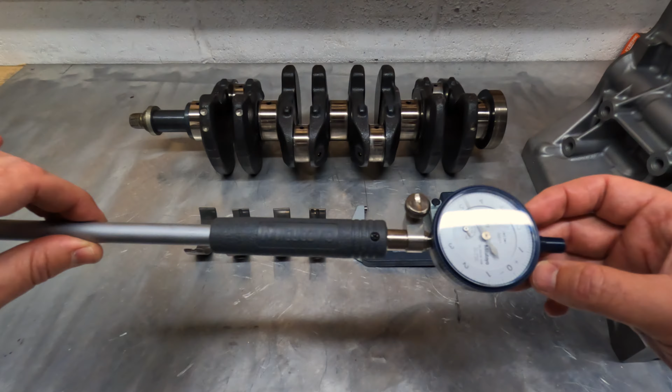So what do we need for this job? Tools wise, we want a bore gauge - this is a Mitutoyo one, and it's imperial, so it's measuring in thousandths of an inch. I've also got a digital micrometer because I'm lazy. I do know how to use a normal micrometer, but I'm just going to use that one for now.

Obviously you need your crank - that's been polished, ready. It looks a bit weird at the moment because it's a bit condensated from being cold in the garage. And then you need a new set of bearings. So that's what you need, and obviously you need your block. Hopefully you can see that.

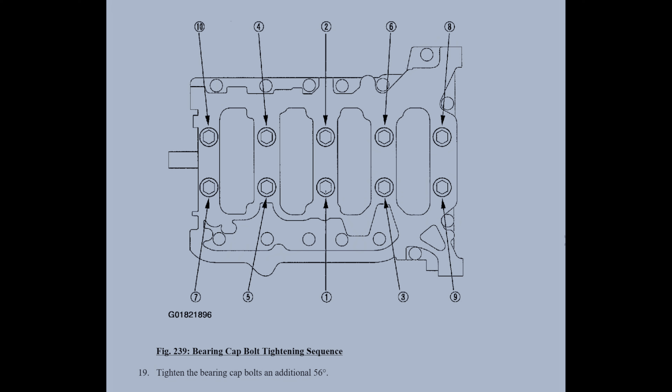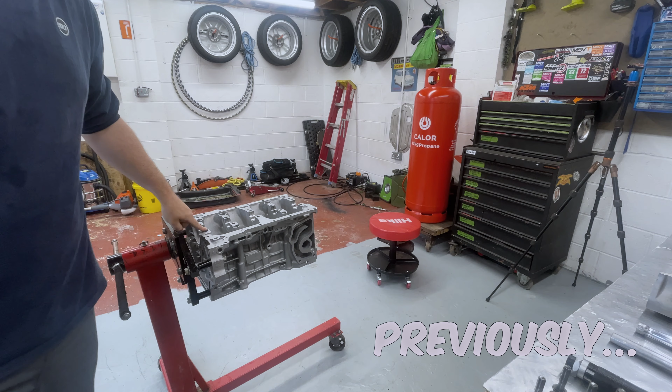Okay, as I was saying before I got rudely interrupted, just swapped out this yellow bearing for a green one. I'm going to pop the girdle back on, tighten everything up in sequence. Got the safety sliders on, obviously.

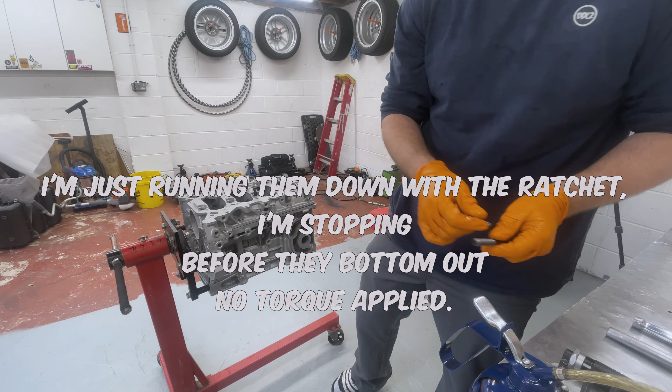Oh, damn it. 29 Newton meters.

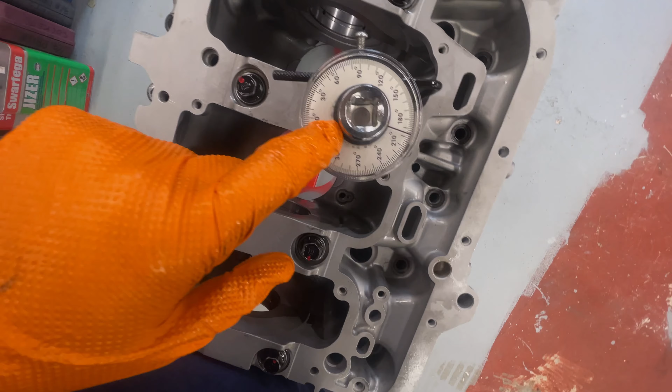Second half involves your angle gauge. So what we're attempting to do here is put 56 degrees of torque on after the 29 Newton meters. You use the bracing bar against the inside here and basically wind this to 0. It'll look off because of the camera angle, but it's bang on. And then we put 56 degrees of torque on it, or 56 degrees of turn.

Try to do one smooth motion as the engine stand moves - annoying. Okay, there's one done.

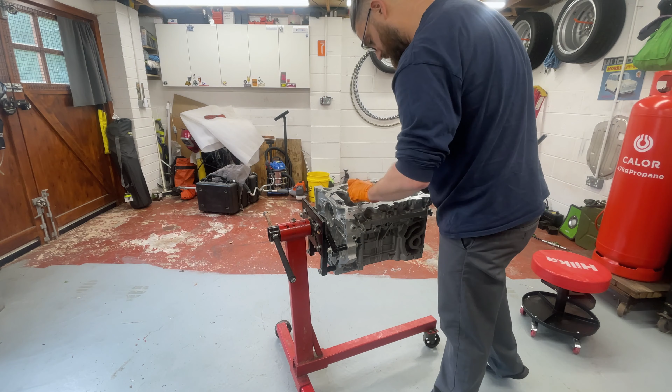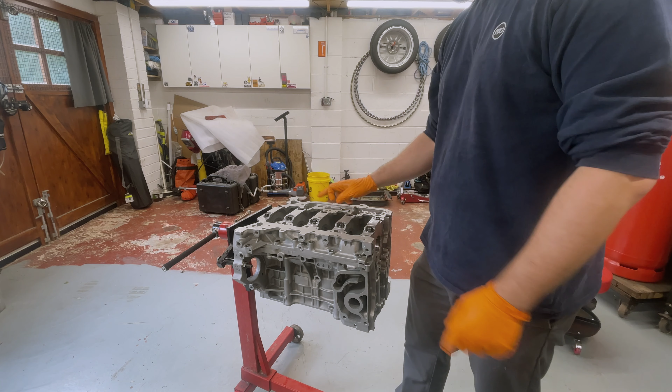Good one. Right, that's the main girdle bolts in - 29 Newton meters, and then 56 degrees, in the sequence 1, 2, 3, 4, 5, 6, 7, 8, 9, 10. Keeping up? Good, I've done this about 1,000 times now.

Right, okay, so then you drop in the outer girdle bolts. You've got 4 long ones that go opposite number 3 main, and another 10 that go around the outside. These are done at 22 Newton meters - there's no angle required, just 22 Newton meters straight on. There is a sequence, similar to the other one, like a crisscross pattern from the middle. It's in the manual, if you download one.

And number 14. That's one. Cool.

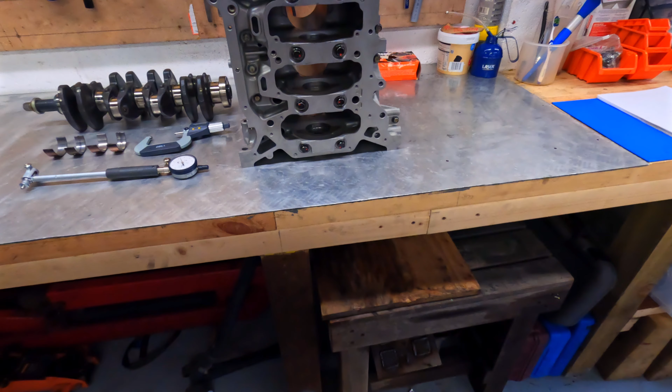See that on nipple cam. I've already got new bearings in there, which I've been checking the sizes using these two tools here. I'm not going to go in depth into how to use these tools - I'm not an expert on it myself. You've tuned in to basically someone that has no idea what they're doing, as you probably already realised. So what are we doing? We're measuring main bearings to work out what bearing shells we need.

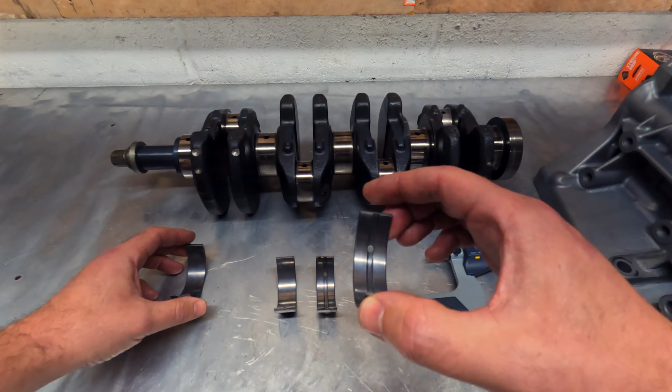So very quickly, the main bearings are here - 1, 2, 3, 4, 5, and the other ones are rod bearings. That's your rear main seal end, and that's your timing end, counted 1 to 5. The bearings come in 2 halves - one has a groove in the middle, an oil galley, and a tang on one side, and these fit into the block, or the top half of the engine. Then you've got these smoother ones, which go into the girdle. The tang on these is in the middle, so you can't mix them up.

Pretty straightforward. These ones on the bench here are newish ones I've been using to measure. You can probably make out the score marks from the gauge - you can't really feel them, but because I'm particularly anal about these sort of things, once I know what colours I want, and I'll talk about the colours in a minute, I'll just put new ones into the engine block. But for now, I just wanted to show you how I've been measuring these.

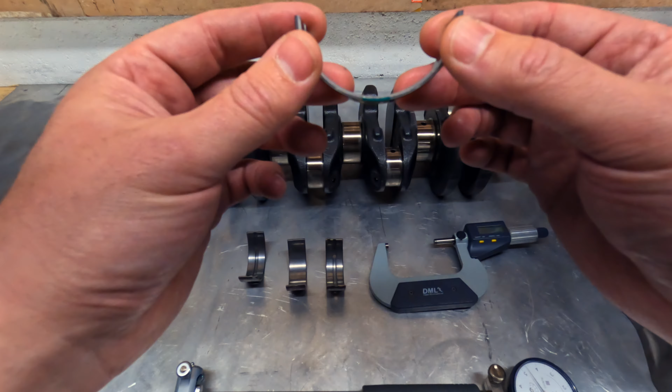Another note on the bearings: all of the Honda OEM bearings are color coded. Hopefully you guys will be able to see this, but there's a bit of green paint on the edge of this bearing, so that's a green bearing. So what, you might ask?

Well, the other part of the puzzle is you need to know what size bearings to start with. You need a rough idea what size bearings you're dealing with. If you haven't had your crank polished and it's your original engine that the crank came out of, you can probably use the same colours again, as long as there's not too much wear on the crank. But because this block is not the original block that crank came out of, we need to measure and check some details.

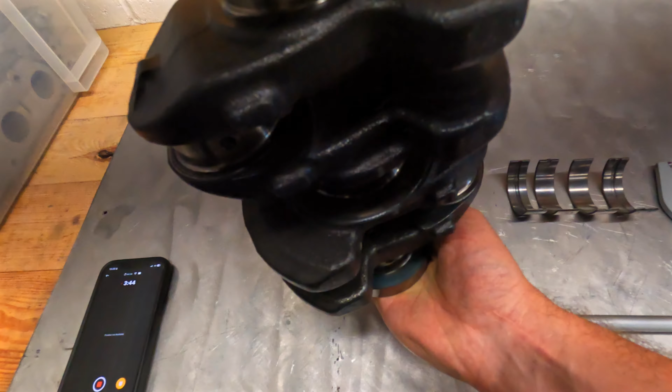On the end of the crank, come on, titty cam, you'll see some numbers here, 34343, and that code relates to what bearings we need. But we need another set of codes which are on the girdle, and you'll find them here, and that one says 34434.

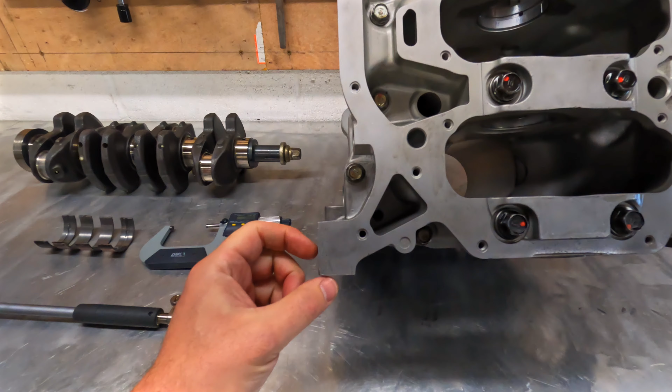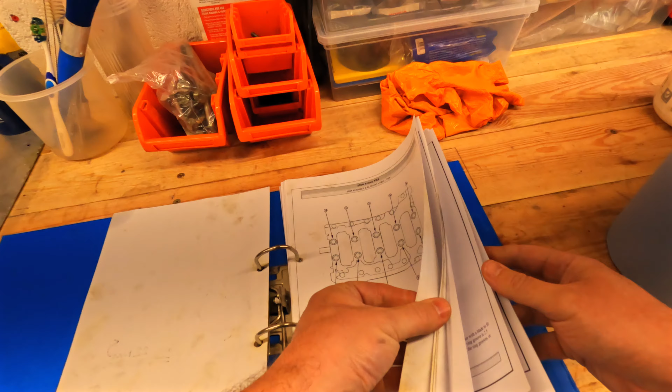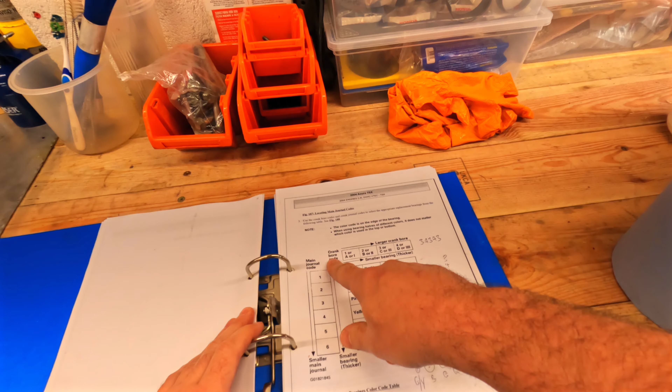So we then go to our manual. It's all in one table, and you can see we've got the numbers here. So the first bearing would be 3.3, so we go along here, crank is 3, main journal is 3. That bearing needs to be yellow and green. Okay, cool. So that's how I've been working out what bearing colours I need.

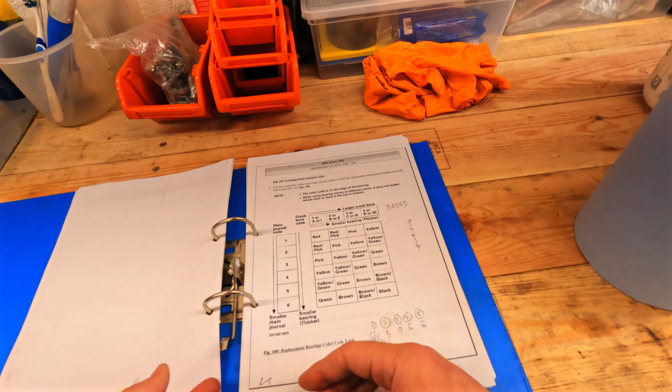Okay, we can use that for a start to get us in the ballpark, but of course, because this is a different block and this crank has been polished, there's no guarantee that those colour combinations are going to be correct. And of course, depending on the type of engine you're building will depend on what oil clearance or bearing clearance you'll want to achieve in your motor. So if you're running a turbo motor, you're probably going to want a bigger clearance because of the heat. If you're running an NA motor, you can have a slightly tighter one.

The manual gives us some guidance on what clearance to use, and I'll show you that now. You would have heard the guidance that for every inch of journal diameter, you use a thou of clearance. So if it was 2 inches, you'd have a 2 thou clearance. Fair enough, but in the manual, the Honda tolerances are actually a fair bit tighter than that.

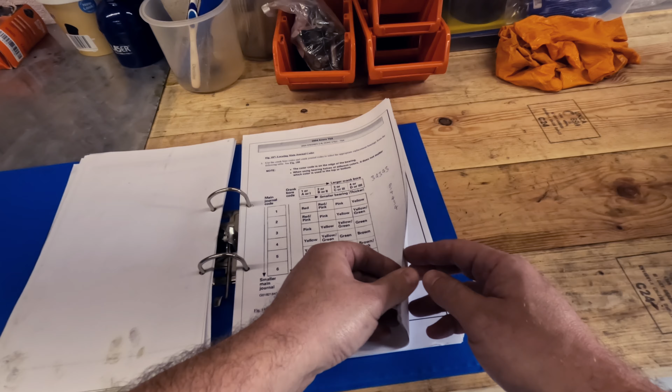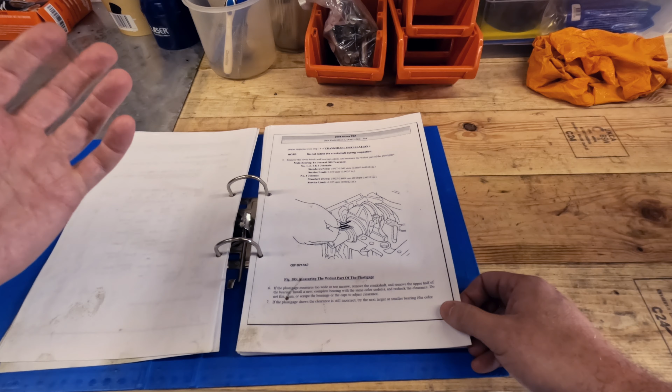I've been given some advice on what size clearances to use for my engine and its application. Obviously, if it's a road engine, you can run slightly tighter. If it's a race engine, you can run slightly wider. And then, of course, oil also comes into it - what oil are you going to run? Are you going to run a thin race oil, or a thicker road oil? So on and so forth.

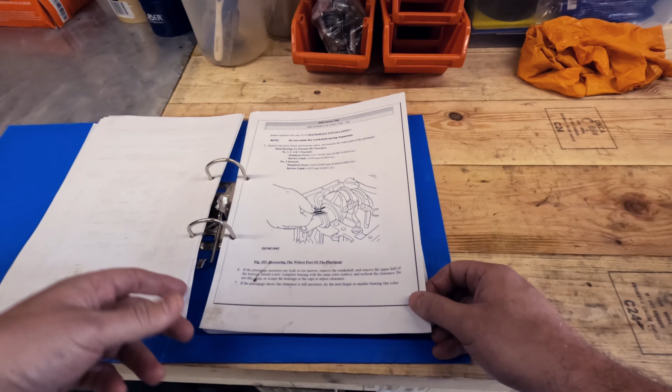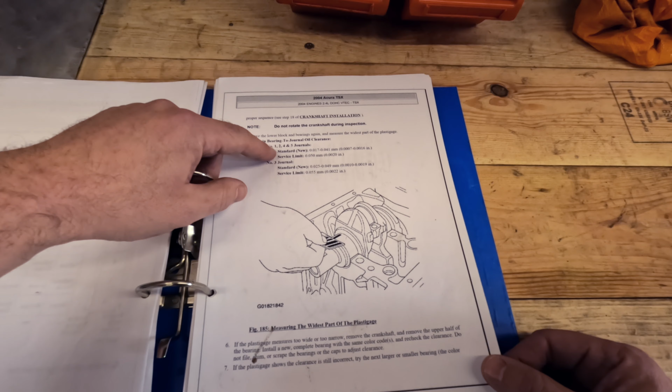Anyway, we can see here, we've got some guidance on main bearing to journal oil clearances. You'll see you've got 2 numbers. Journals 1, 2, 4, and 5 are different from journal 3. But the long and short of it is a new bearing in 1, 2, 4, and 5 needs to be between 0.7 and 1.6 thou. That's how you read that.

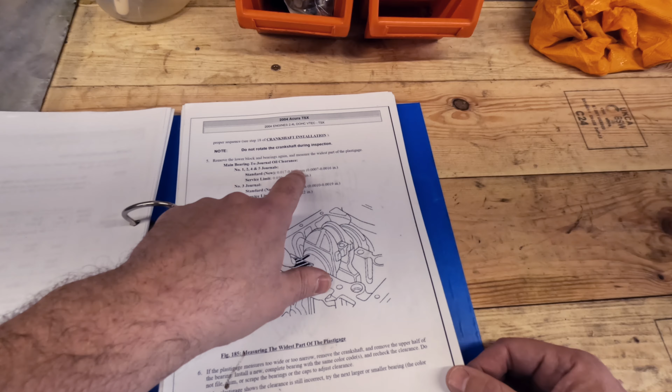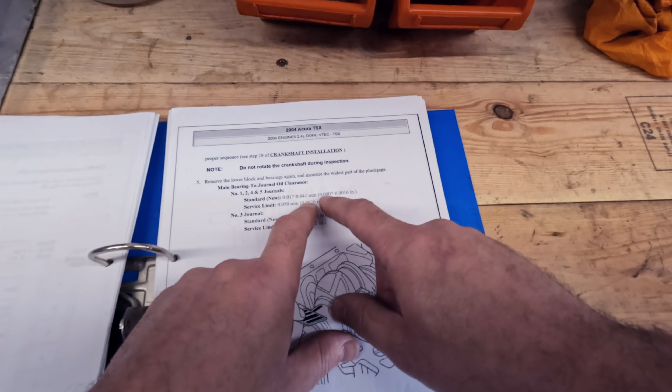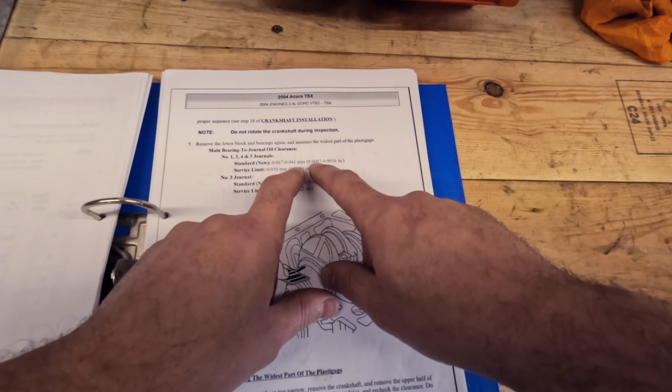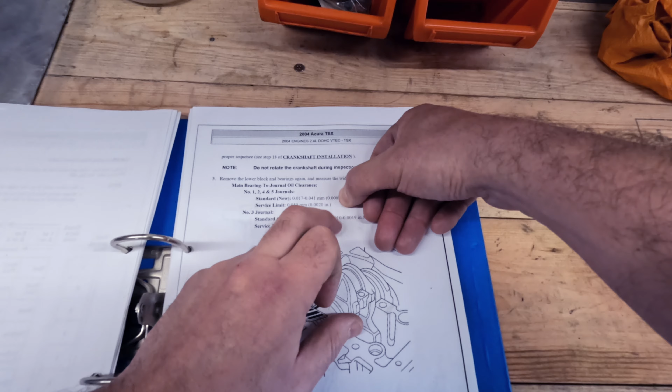In case you've never read in thou before, you can use millimeters if you want, if you're more comfortable with that. But obviously this is tens - how do I explain this - so that would be tens. I don't know the best way to explain this, but basically if this was 1,000, that'd be 1,0,0,0. And if you want to go into tenths, you've got another number on the end there. If you ignore that and just look at 0.000, that's reading down to 1,000ths of an inch, and that's down to 10,000ths of an inch. Going down to the 7 - so if we ignore that for now and just say 0.000, if the end 0 was a 1, that would be 1 thou.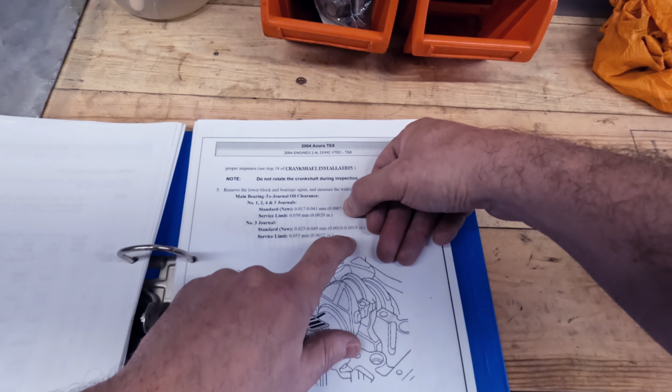Okay, makes sense. If the end was a 2, that's 2 thou, and so on. So when I refer to 0.7 of a thou, what I mean is it's 7/10ths of 1 thou.

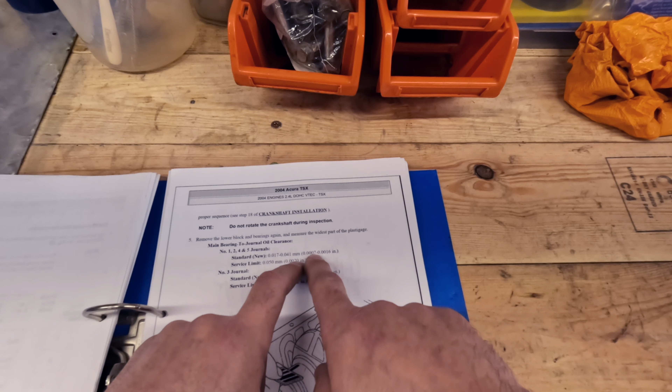Hopefully that makes sense. My engine builder, the guy I've been speaking to, has recommended I aim for about 1.5 thou, which would look like a 1 and a 5, which is closer to the largest size that the Honda manual is kind of recommending.

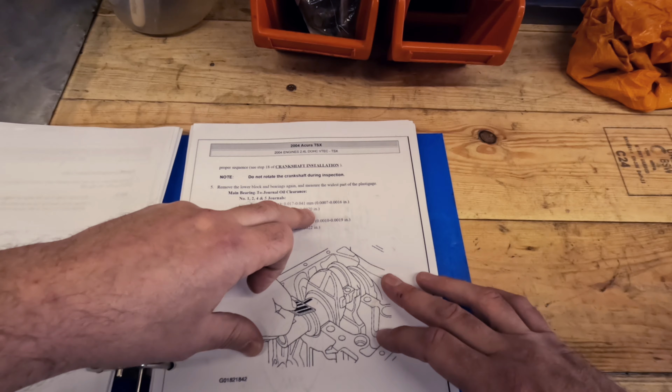Then you've got a service limit here. Obviously, once you get to 2 thou in the manual, it's saying that you should replace it or think about doing something with it.

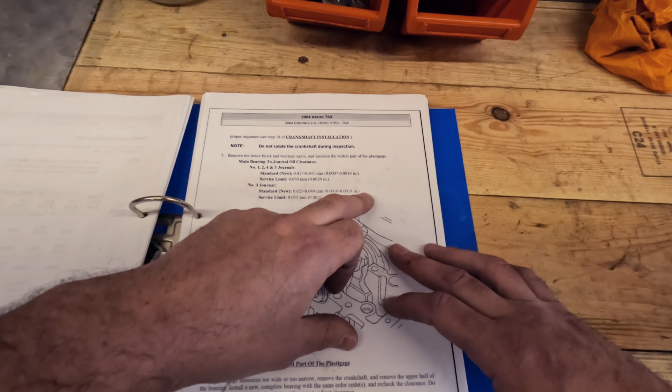And then you've got a bigger clearance on number 3, but again, I'm aiming for 1.5 thou, so that would be 15 at the end, if you know what I mean. Cool, hopefully that makes sense.

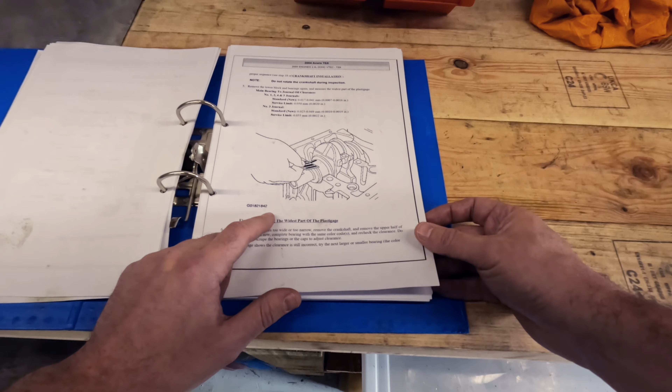They use Plastigage. I've struggled to use Plastigage - I've got inconsistent results with it. I'm going to use measuring tools instead.

So that's that. Cool, that is a hell of a lot of waffle. So let's actually do some measuring and I'll show you the process I've been following. If any engine builders or machinists out there are laughing now, stop - just stop. Please tell me how.

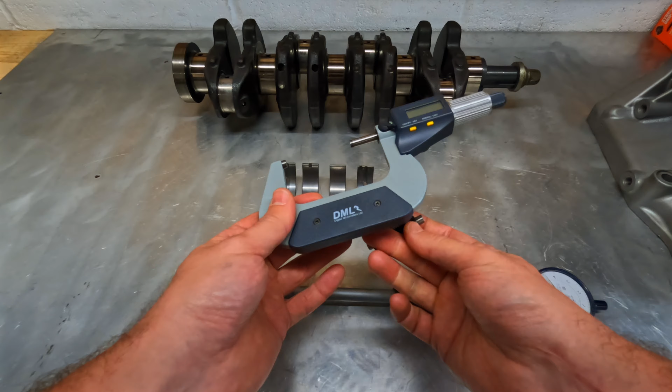Okay, so before we get started, we're going to zero our micrometer to make sure it's accurate. I know I said I wasn't going to go in depth on these, and I'm not, but yeah, I'm going to zero this.

So it's got a 50mm zero tool, or zero block, if you like. Try and do it so you can see it, hopefully.

I'll put this back in millimeters. So just for the sake of zeroing this, I will turn it to millimeters, but I'll switch it back to imperial, or as the Americans call it, standard. Because it is the standard, right?

So you make sure the anvils are pretty clean. Anvils are the ends of the tool - the measuring surfaces, if you like, the measuring faces.

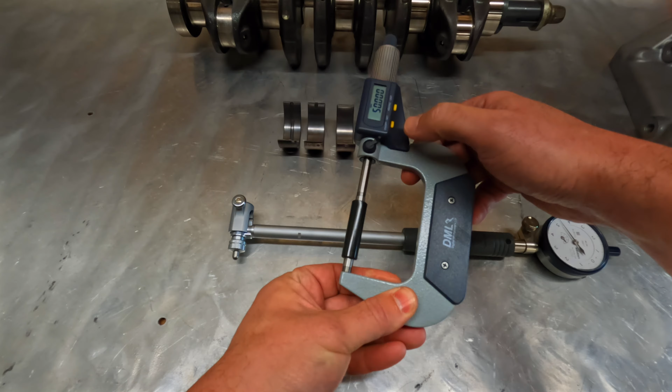So you can see that's 0 to 50mm, hopefully. Turn it back into inches.

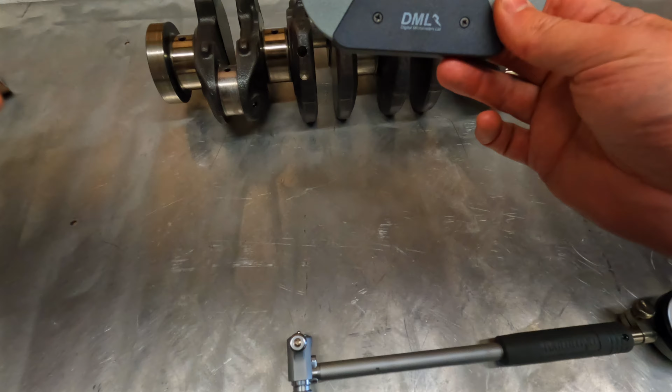Okay, so I'm not going to demonstrate absolutely every single bearing because that would just take me all day, and I've already done it. So for now I'm just going to go through the process of measuring one to show you what I've been doing. And if anyone wants to let me know if I've been doing it wrong, I'd appreciate it.

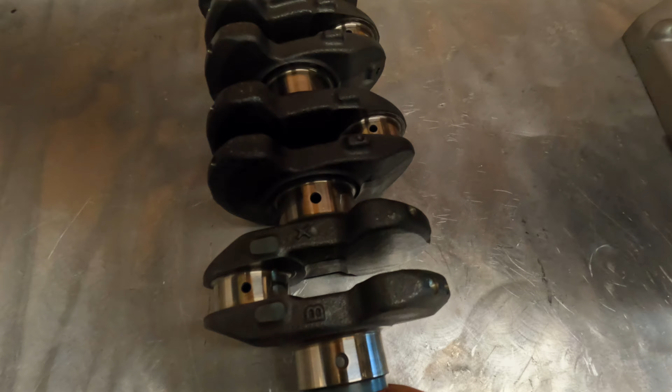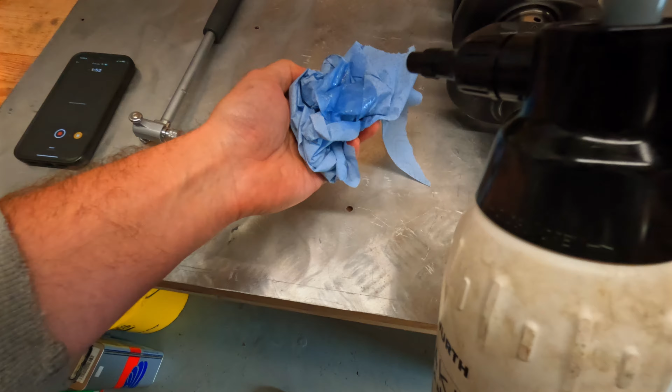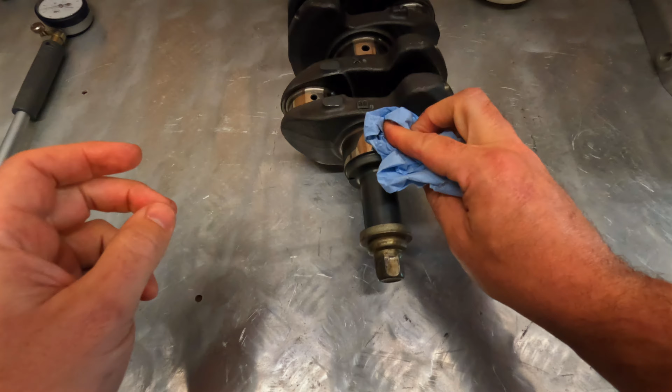So this is just a bit of brake clean, because of the condensation, and if you've got any contaminants on there which could affect your reading, give it a quick wipe with brake clean.

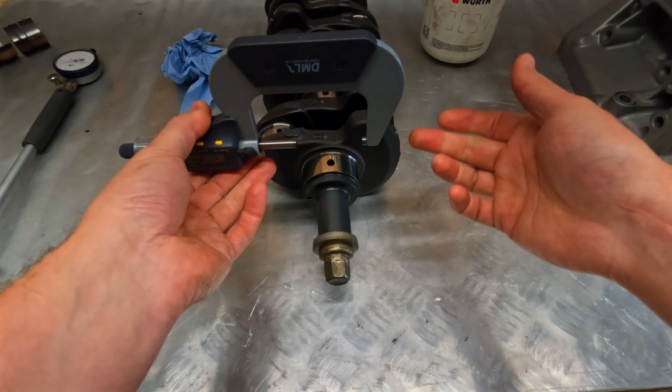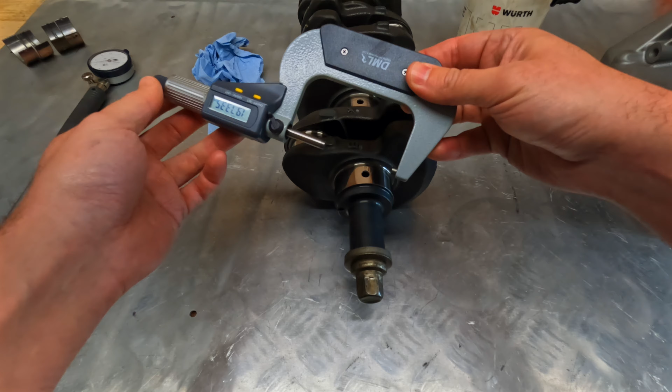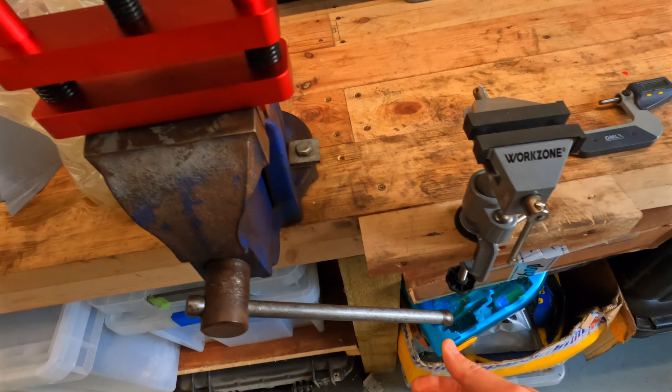So what we do is we take this out of here. That's for something else - I'll show you guys later what that is.

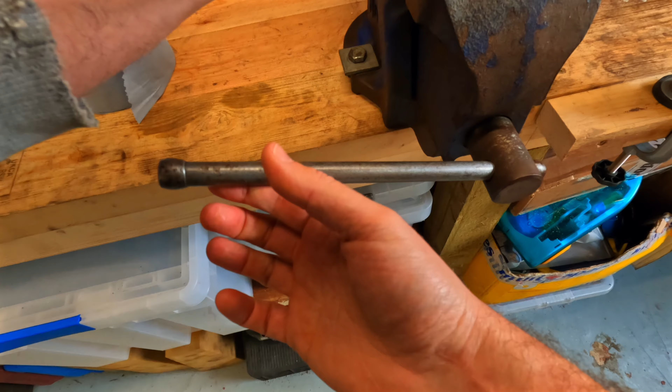So we put our micrometer in the vise. Don't absolutely crank it down, there's no need.

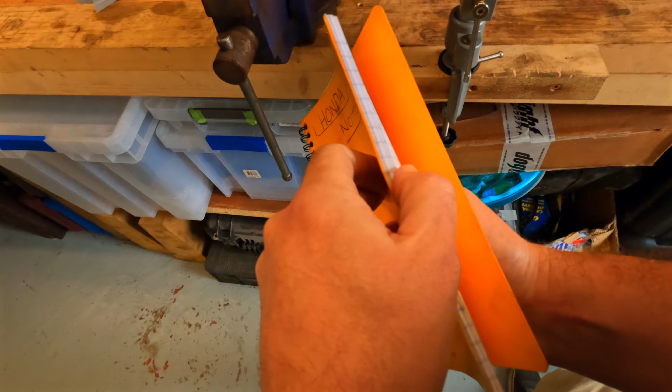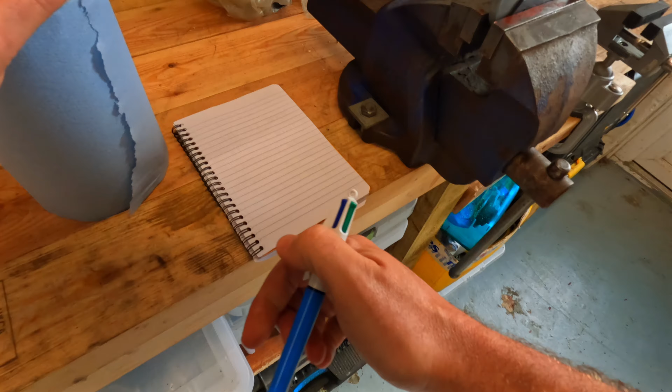For the sake of this, there's a lot of crap in here. For the sake of this demonstration, I should probably cut a lot of this out - I'll have people whinging at me that it's 15 minutes of video, it's too long, it's pain. Go watch TikTok then. Right, so what did I write?

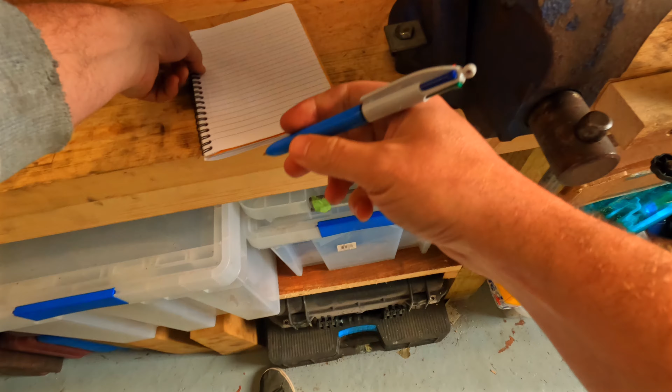2.16485, right, so we're saying that's bearing number 1. That's the journal size, right?

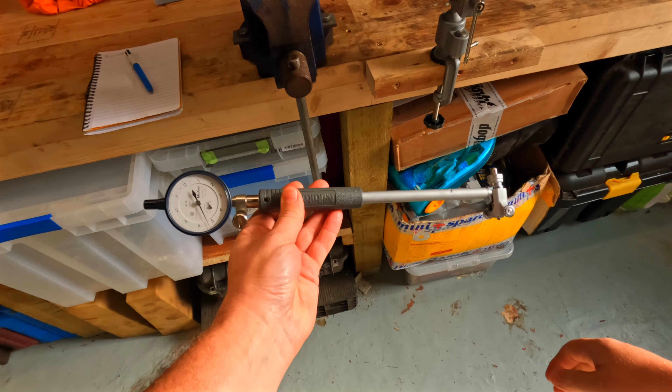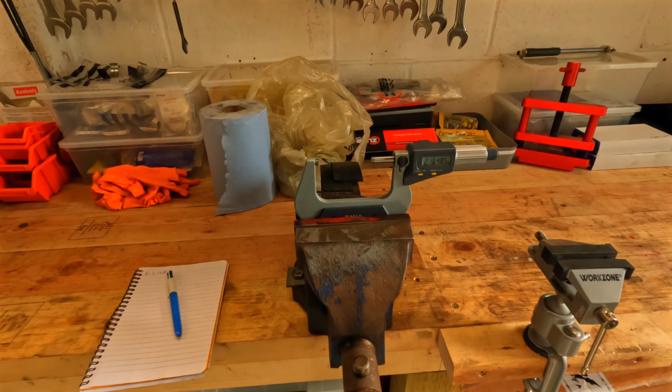Cool, the next bit, which is the other tricky bit, is we now need to zero our bore gauge. I don't know how well this is going to show, might have to tilt you up a bit. Oh, it's not really wide enough, is it? Bastidos.

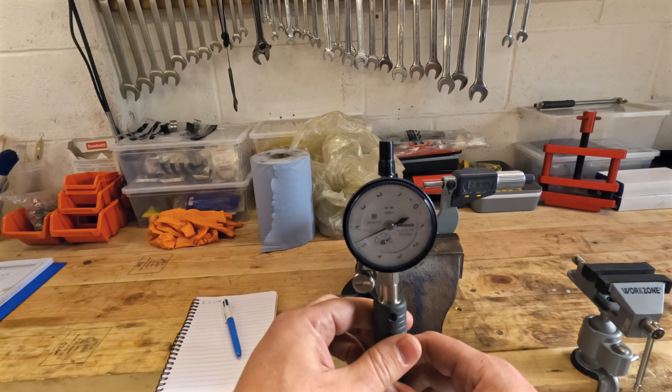Basically what we're going to do is put this anvil here in between the anvils of the micrometer, and what we're trying to achieve is to get this dial to read 0. Once we've got that, the technique for doing this, or so I've discovered... oh man, I really want to try and get this. How can I show you this? Bear with me, I hope you can see this, this is going to be tricky. So basically what we're trying to do is zero the gauge in here.

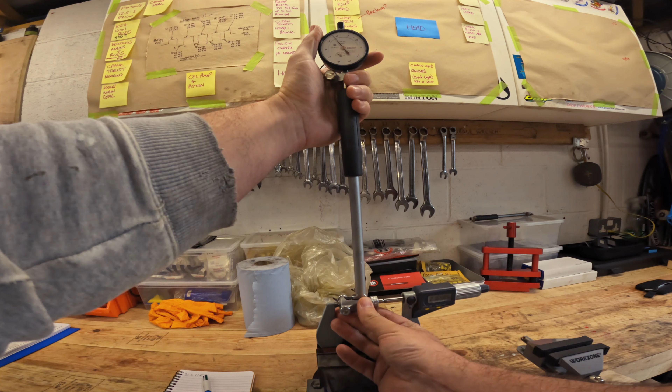You'll see as I sweep, as I move this in the anvils, the gauge is moving, and we're trying to find the 0 point. So we're trying to find the point where the needle won't go past 0 anymore. See, it's quite close there, hopefully. It's gone too far.

So once you do the up and down, which is kind of like this motion, I'm also slightly twisting it just to make sure I've not missed a low spot, or I'm just off slightly. So hopefully, I'm trying to lean back a bit so I can get this in shot. Well, hopefully you can see I'm a little bit off.

Right, so I'm pretty confident that you can see here, that's 0. Try and get it back to 0. There. Right, hopefully that makes sense.

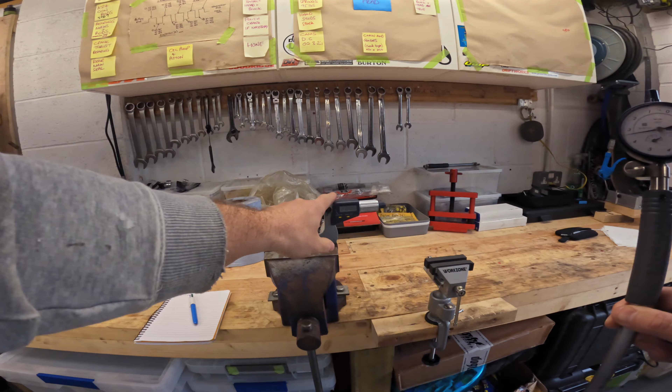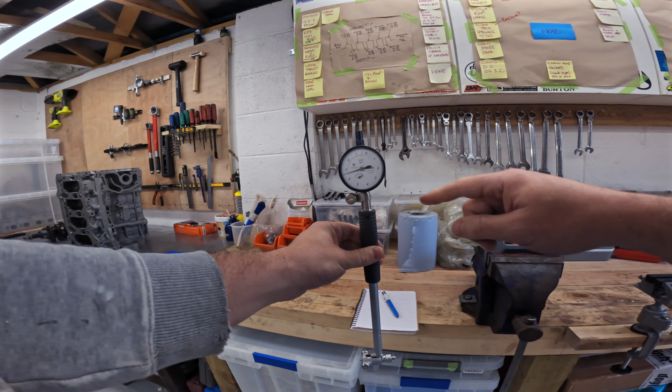So you measure your journal with your external micrometer, you lock that off, you then zero this, and then whatever number we see on this, when we put it into the block, will be the oil clearance. And we're aiming, if you remember, we're aiming for 1.5. That's what we want, that's 1 thou, or 1.5 thou, basically.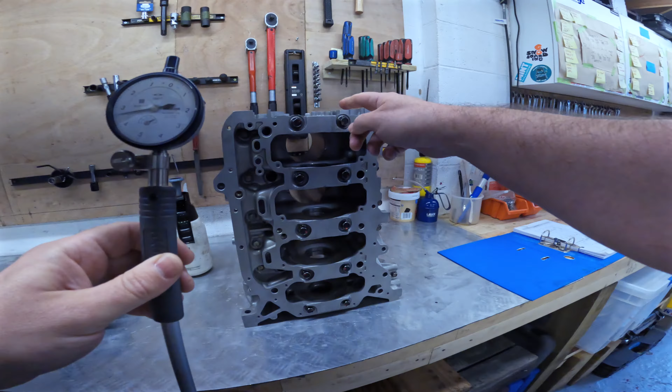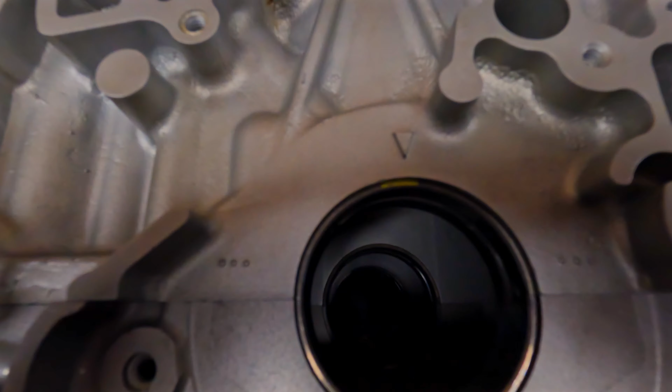So we make sure we measure in the right hole. For this one, it's number 1 at the top, and at the moment, if I take this off, I should be able to show you. So at the moment, in bearing number 1's housing, we've got a yellow on the block side, or what I call the top side of the engine, and then this is the girdle bit.

You can see the split in the middle here. Although you can't see the colour on that because it's on the other side, I can tell you it's a green. So that's a yellow green.

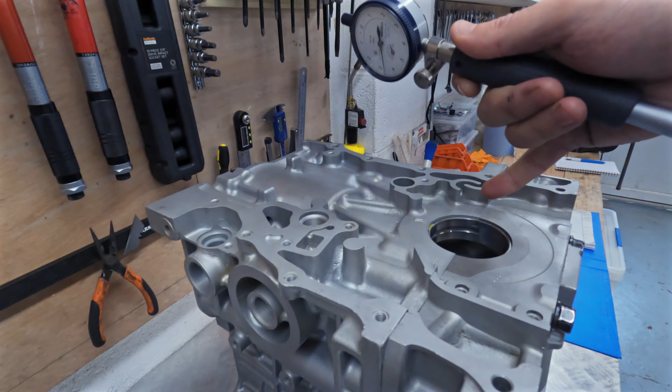So what we're going to do now is put the tool into where the bearing is. We don't want to measure in the oil galley, in the little groove I showed you earlier, hopefully you can see it there. We don't want our measuring tool in there. We want to measure top to bottom because that is the tightest point. Believe it or not, these aren't perfectly circular, and the tightest point is top to bottom rather than left to right, and that's to allow oil to go around your crank.

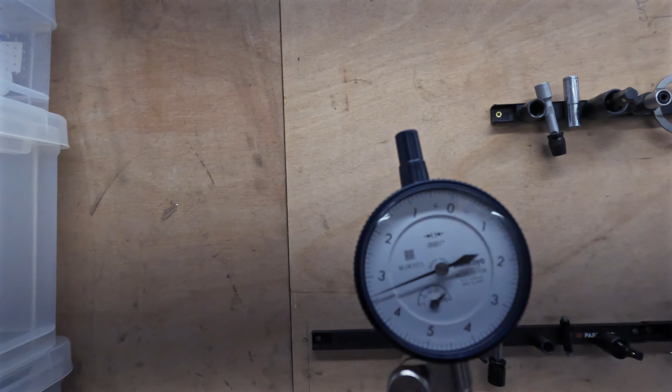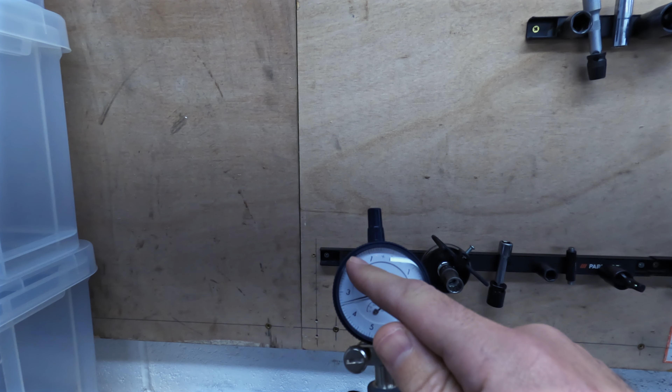What we do is put this in and basically rock it back and forward like we did in the micrometer, and we're trying to see what number we get on the gauge. This gauge has been zeroed, as I showed you a minute ago, and the big numbers represent thousandths of an inch, so 1 thou, 2 thou, 3 thou. So we want to be between 1 and 2, ideally at 1.5, and that's what we're aiming for.

So I'm going to try and video this, this might be a bit tricky. Right then, hopefully this is going to work, I'm making no promises. Basically, we're going to put this in here.

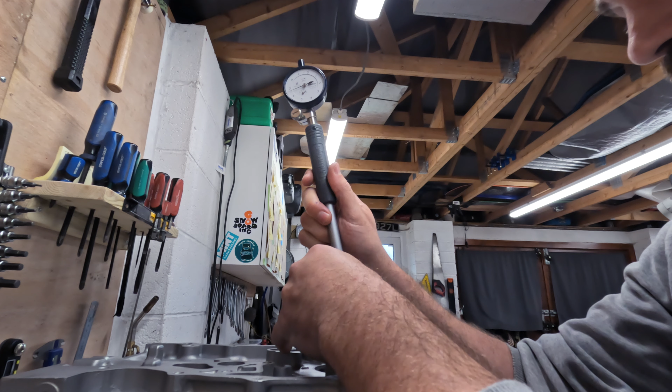You can see at the moment, as we move the gauge around, as we move the tool around on the bearing, we can see it move. We get about 1.4 there, so that's 1.4 thou, just under 1.5.

That's it then, really, that's basically what I've been doing to measure the bearings. Obviously you repeat the process for each individual bearing. You have to measure each journal, zero this every single time, and then check what bearing clearance you've got. And then you repeat the process for each of the 5 bearings.